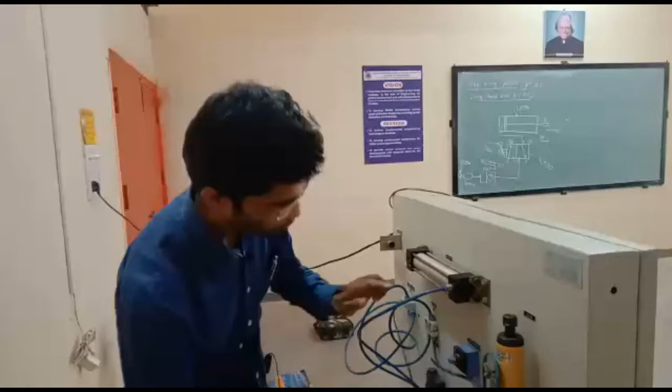Motion of the single acting cylinder is controlled with the help of this 3x2 hand operated direction control valve. So this 3x2 valve has 3 ports and 2 positions. You can observe here. This port is called the P port. That means pressurized air from the FRL unit is supplied to this port. So this is the pressure port.

Then on the side of the pressure port, this is the exhaust port. So air is exhausted to the atmosphere from this port. And on the other side, this is the A port. This A port is connected to the cylinder, that is the single acting cylinder.

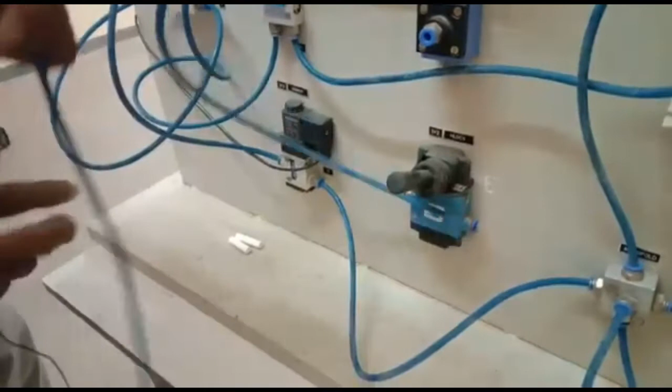So from the FRL unit, first air is supplied to the manifold. From the manifold, these are the connectors. We can connect this to the pressure port. So now air is supplied from the manifold to the pressure port. When we activate or operate this lever, then from the P port air is supplied to the A port. So we need to connect the A port to the single acting cylinder.

So this is the connector. Connect the A port to the input of the cylinder. So when we activate or operate this lever, air from the P port is supplied to the A port and then it is supplied to the cylinder. Then this piston will move in the forward stroke.

And once we turn off this direction control valve by operating this lever, air is exhausted through this pipe from port A to port E. So air is exhausted to the atmosphere and then the piston will move in the reverse stroke. That is the retracted position.

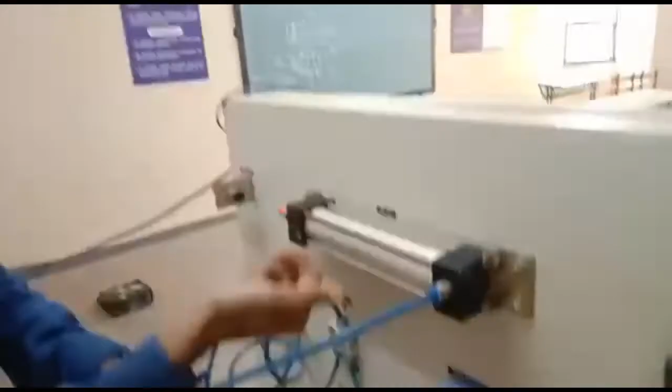So this is the forward stroke. Air is supplied from the P port to the A port. It enters into the cylinder, it creates pressure and then this piston moves in the forward stroke. So when we change the direction of this direction control valve, air is exhausted from the E port.

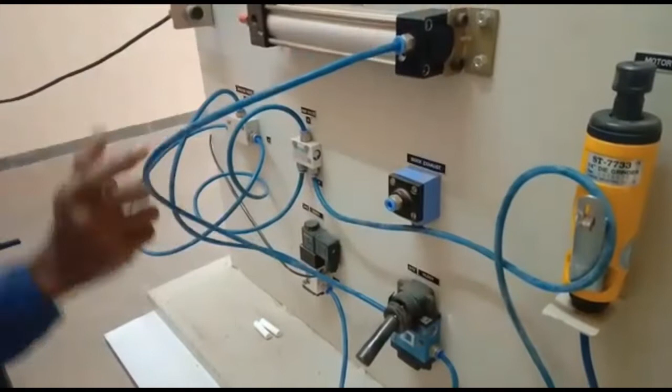So this condition is called the normally closed condition; the A port is connected to the E port. That means air from the cylinder enters the A port and then it is exhausted from the E port. So this is the operation of a single acting cylinder using a 3x2 hand lever operated direction control valve.

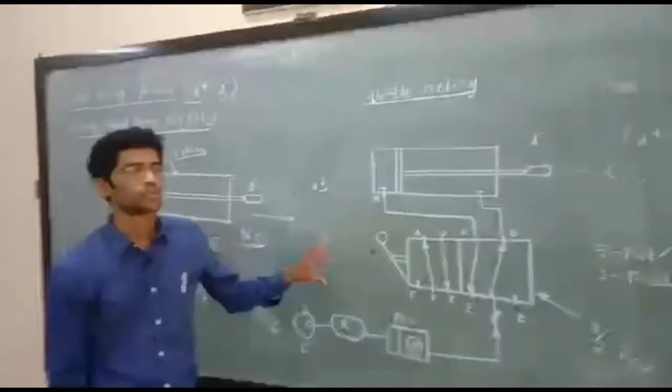With the help of this second circuit, we will understand the working of the double acting cylinder using a 5x2 direction control valve. The double acting cylinder movement is controlled using the 5x2 direction control valve. So what is the meaning of 5 and 2? 5 is the number of ports and 2 gives the number of positions. Of these 5 ports, 2 are input ports to the double acting cylinder, A and B, 2 are exhaust ports and 1 is the pressure port.

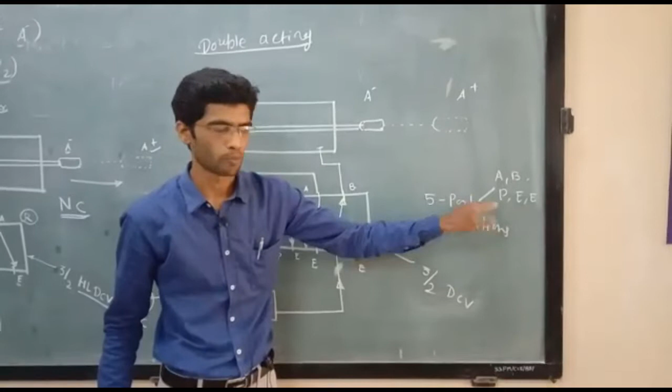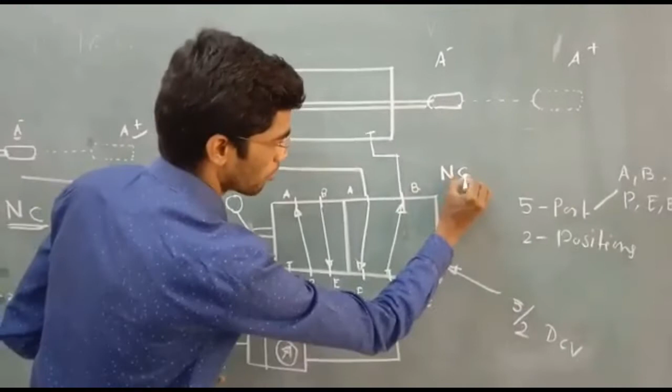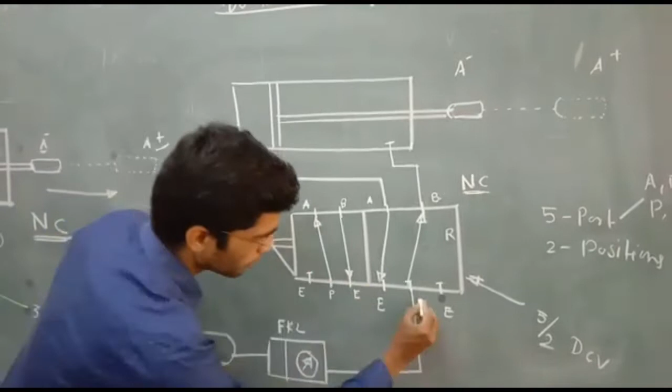You can observe here, this is the schematic diagram for the 5x2 direction control valve. Initially, the direction control valve is at the normally closed position. In the normally closed position, the right hand side is active. In the right hand side, you can observe the ports. This is the pressure port. The pressure port is always connected to the FRL unit, that is the air service unit. It receives pressurized air through this connector.

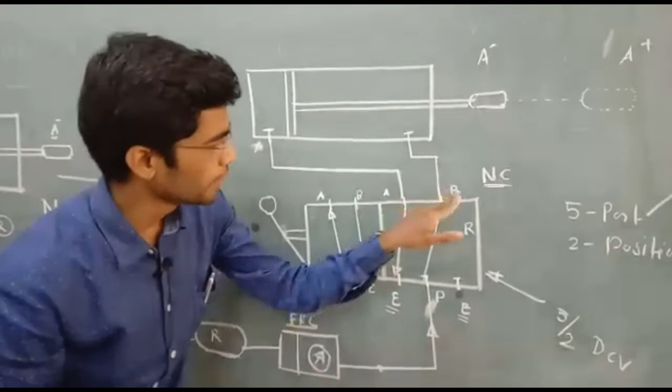Then it has 2 exhaust ports and 2 ports, A and B; one is connected to the left side of the cylinder and one to the right side of the cylinder. So when the direction control valve is at the normally closed position, pressurized air is supplied to the right side of the cylinder through the B port. That means the B port is connected to the pressure port, that is the P port.

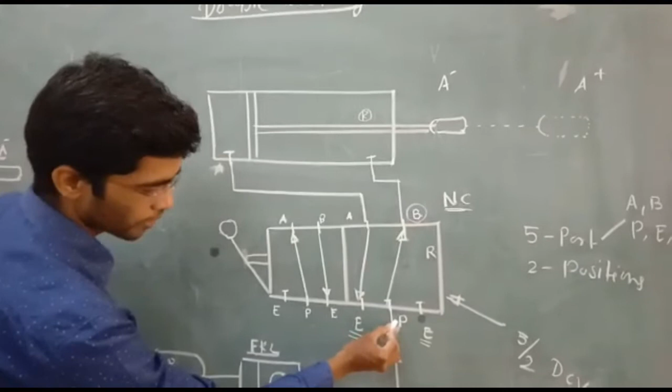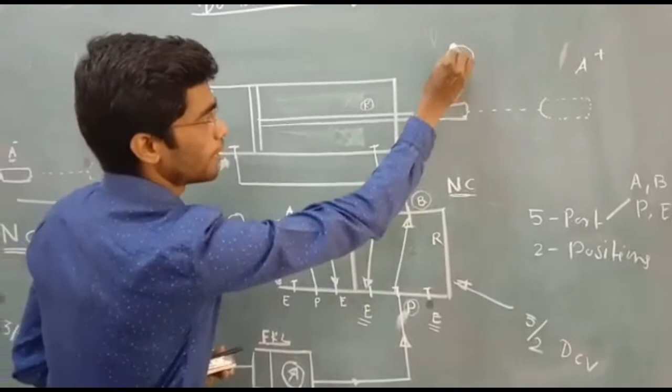So air enters port P from the FRL unit. Then from the P port, air is supplied to the B port and it enters the right side of the cylinder. So in this condition, the piston is at the A minus position. Then we operate this lever; this is the hand operated direction control valve.

So when you press this lever, then the left side will be activated. In the left side, you can observe the connections. P port is connected to A port and B port is connected to the exhaust port. That means from port P, air is supplied to A port, and A port will be connected to the left side of the cylinder.

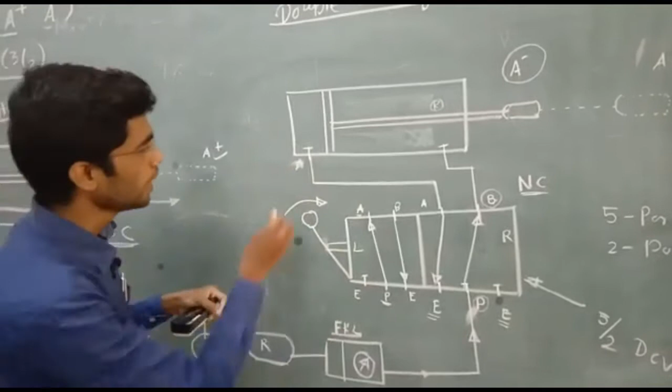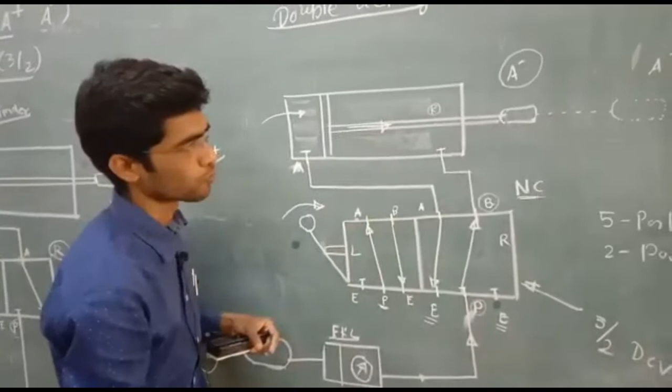So that means pressurized air will enter on the left side, it will create the pressure, and then this piston will move to the forward stroke. That means it will take the position of A plus. So this is the A plus position when you operate this lever. When you operate this lever, the left side will be activated, and these are the connections.

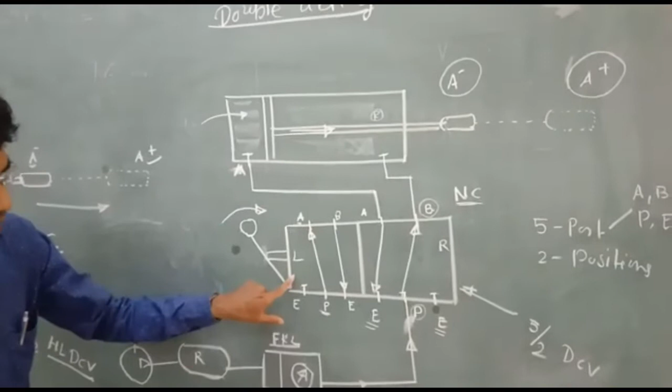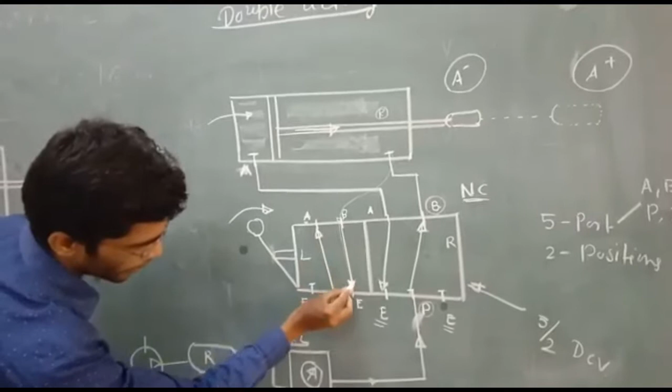At the same time, air from the right side will enter into the B port, and from B port it will enter into the E port, and it is exhausted to the atmosphere. So this is the schematic diagram for the 5x2 direction control valve for the double acting cylinder. Now we will see the working.

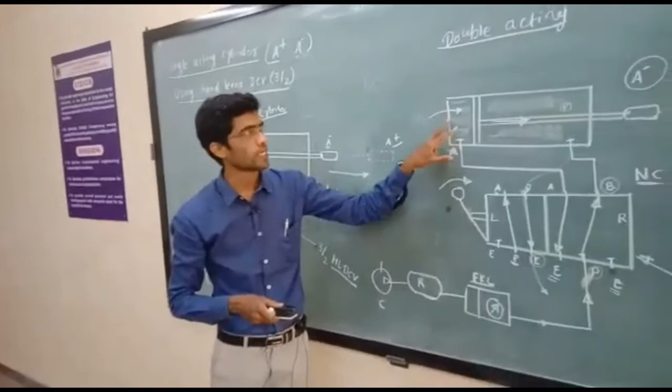So now you can observe here, this is the FRL unit. This is called the air service unit. From the air service unit, you can observe here, this is the connector which goes to the manifold. From the manifold, pressurized air we can supply to the P port of the direction control valve. So this is the 5x2 direction control valve. It has 5 ports and 2 positions.

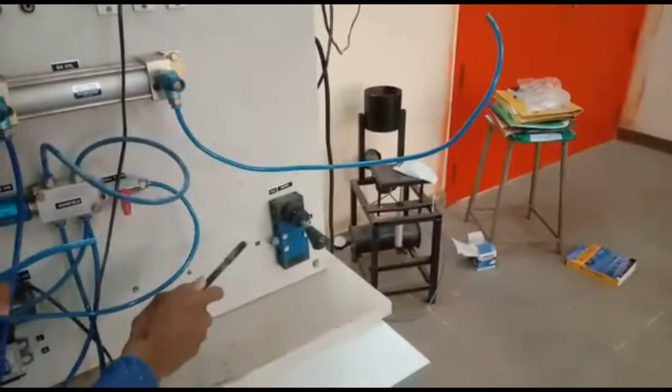So you can observe 5 ports. This is A port, this is port B. These 2 ports are connected to the cylinder. This is the pressurized port which receives the pressurized air from the air service unit or from the manifold. And you can observe here 2 exhaust ports. So air is exhausted to the atmosphere from these 2 ports.

Now for the connection, you can observe this is the double acting cylinder. So you can say this is the A port and this is the B port. So first we will connect the manifold or FRL unit directly to the pressure port. So this is the first connection. That means air will enter into the P port. So this is the pressurized air. Now we have to connect A and B port to the double acting cylinder.

So this is the A port, which is connected to the right side, and we can connect the B port. So this is connected to the left side. So when we operate this lever, one side will be activated in the schematic diagram. And as per the connections, air will enter either on the right side or on the left side. So you can observe the working here.

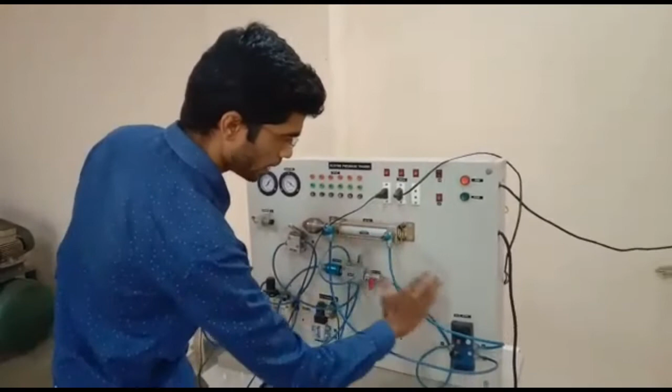So this is called the normally closed position. That means from the right side air is exhausted. So in this condition, A port is connected to the exhaust port, and P port is connected to the B port. Now when I operate this lever, from A port air will enter on the right side. So it will create the pressure on the right side and it will push the piston to the left side.

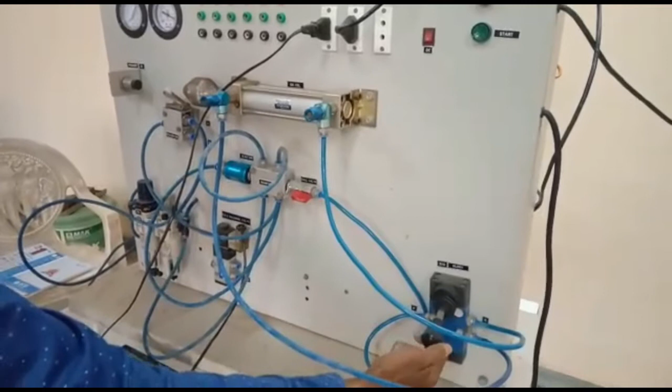At the same time, air from the left side will enter into this connector. It will enter into the B port, and from B port it will enter into the exhaust port, and then it is exhausted into the atmosphere. So observe this. So this is the forward stroke. That means the cylinder is moving from A minus to A plus position.

So in this operation, left side air is exhausted from port B to port E, and this is the normally closed position. So this is the retraction. So in this operation, from the right side air enters into the A port and then it is exhausted from this port.

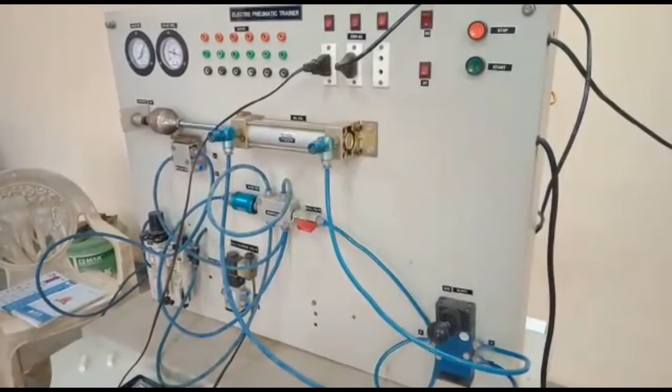So again observe this. So this is the A plus position, and this is the A minus. So this is the working of the double acting pneumatic cylinder using a 5x2 HLDCV, that is, a hand lever operated direction control valve.